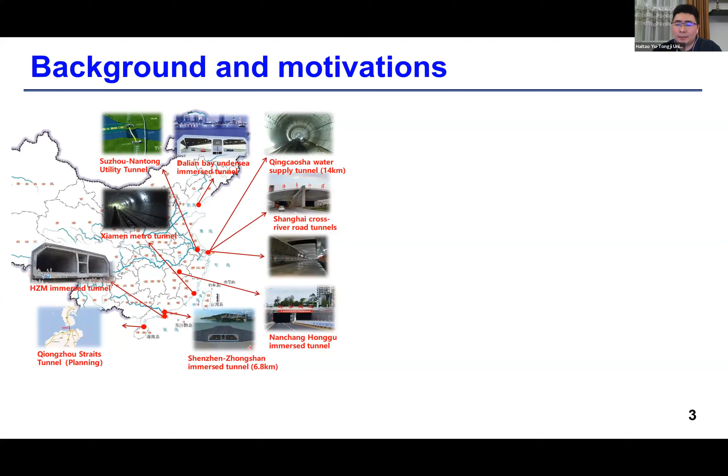As we know, underground constructions are booming recently, especially in China. For example, there are a number of submarine tunnels distributed in the eastern coastal areas of China, and also a large number of mountain tunnels in western areas of China. But during the 2008 Wenchuan earthquake with a magnitude of 8, we investigated 55 mountain tunnels close to the epicenter and found that 38 of them were damaged at different levels, including cracking, concrete spalling, and even collapse of the whole tunnel liner.

This brings evidence that seismic design for tunnel structures is still an important issue which is not well understood yet.

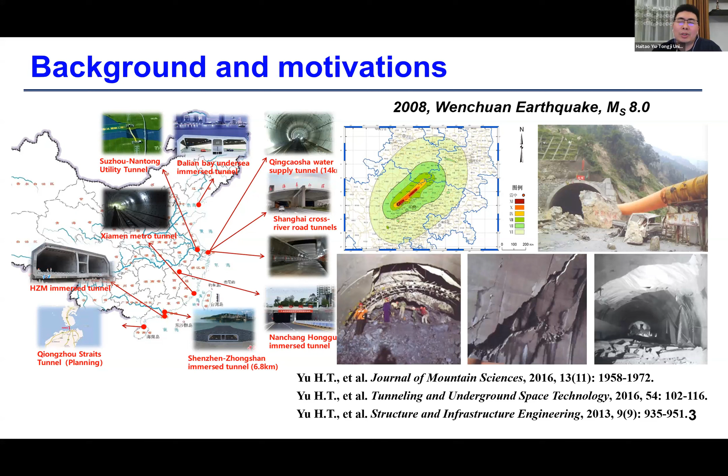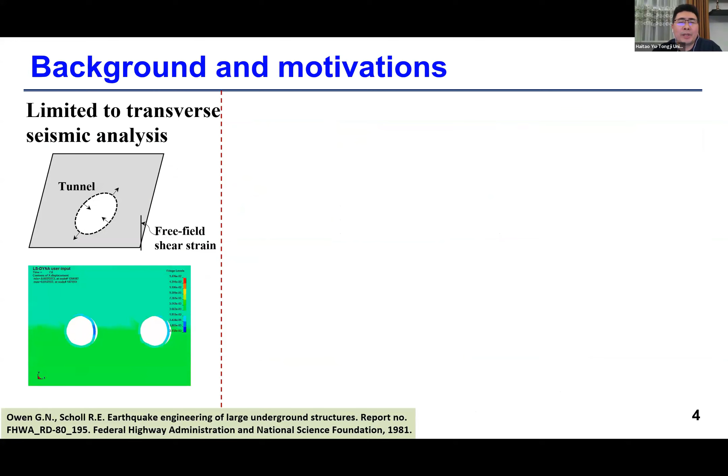From the literature review, current studies on seismic analysis of tunnel structures focus on 2D conditions and cross-section response. That is, they assume the problem as a 2D plane strain condition and only consider the shear deformation of the tunnel section under vertical shear loads.

But there are still two other deformation modes along the tunnel. One is called worming deformation, where the tunnel has axial compression and extension. Another is called snaking, where the tunnel has longitudinal bending deformation. This deformation mode was already reported by Owen in 1981.

Also, tunnels have long distance, so as the earthquake travels, each section of the tunnel may experience a different time lag due to the wave passage effect. Another issue is that the tunnel crosses different soil mediums with different soil stiffness, which causes non-uniform seismic input along the tunnel. But currently, few studies have been reported in this field.

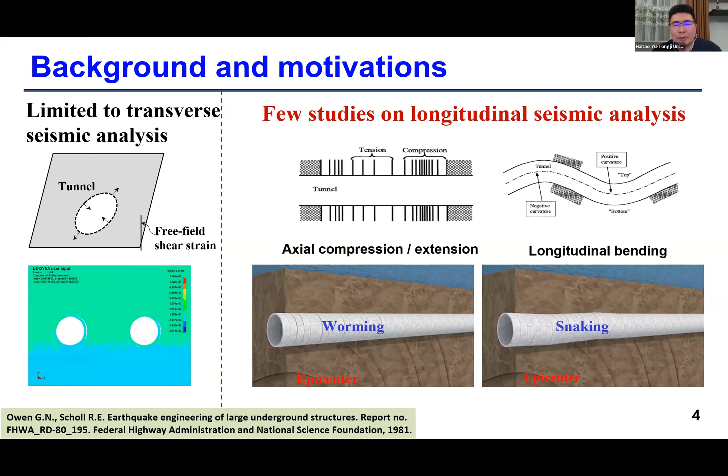That's the focus of my research. To understand the longitudinal response of tunnel structures and the non-uniform seismic input, we propose several seismic analysis methods. We can use current on-site seismic monitoring to understand the seismic effects of the site, but it's hard to use for understanding soil-structure interaction under seismic loading, because we don't know when, how, or where the earthquake will come. So physical model testing will be one of the options to understand the tunnel response under different seismic loadings.

Currently we have advanced facilities like at Tongji, where we have 4 large shaking tables that are movable in a long trench with a total length of 70 meters. This facility was originally developed for bridge engineering, because for each bridge pier we can put on one shaking table, allowing us to realize non-uniform seismic input. But the critical issue for simulating non-uniform seismic input for long tunnels is how we can use 4 discrete shaking tables to realize the continuous seismic input from the bedrock.

So to solve these issues, we first propose the test theory that we have to develop the model container to transfer the seismic input from the shaking tables into the bedrock. First, we can assume the model container as a beam.

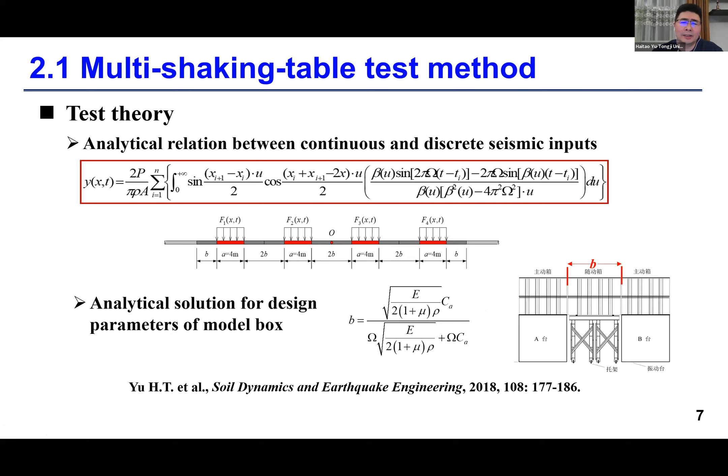design parameters, so with this theory we made a model container which consists of segmented boxes and connections between each of them, and also a supporting system to keep the model container moving horizontally, with no friction between the supporting system and the model container by using a ball joint. The total length of the model container is 40 meters, the width is 4.5 meters, and the height is 1.5 meters.

When this facility was done, we did a number of validation tests, including not only the vacant model container but also the free field test. We can see that the acceleration from the bedrock at the bottom of the model container, in either the transverse or longitudinal directions, are consistent.

The test data are consistent with the theoretical value, and the errors for the phase angle wave passage effect can be neglected. This first demonstrates that the developed model container can well capture the wave passage effect from one side to another.

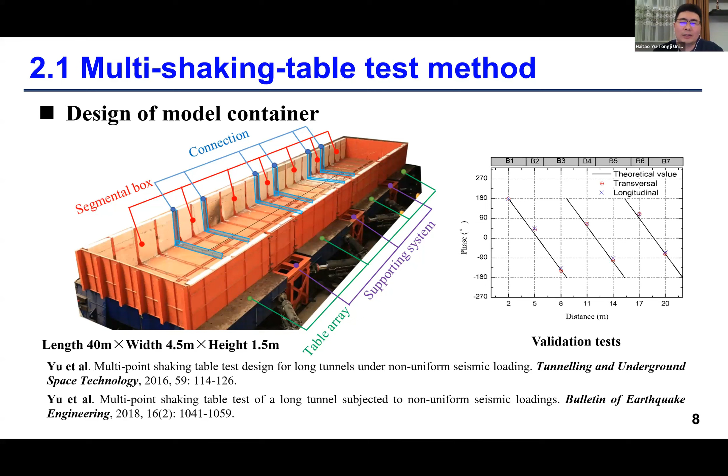With this facility, we actually applied it to several projects in China. Here is one, a super long immersed tunnel with a total length of 6 kilometers, which is the world's longest immersed tunnel, connecting three cities: Hong Kong, Zhuhai, and Macau. We put the whole tunnel in the model container to simulate the non-uniform seismic input on the tunnel response, with a geometric scale ratio of 1 to 60.

The model soil was a mixture of sand and sawdust, and the model tunnel is made of aluminum. We also further considered the immersion joint configurations, based on the equivalence of joint stiffness principle.

With this developed and established shaking table test facility, we did a number of shaking table test cases, including not only uniform and non-uniform seismic input, but also different seismic waves, seismic input intensity levels, and different directions.

We obtained the result that, compared with uniform seismic input, non-uniform seismic excitation would significantly amplify the tunnel response. For example, for the immersion joint deformation, it will be amplified to over 3 to 5 times compared to that of the uniform seismic input.

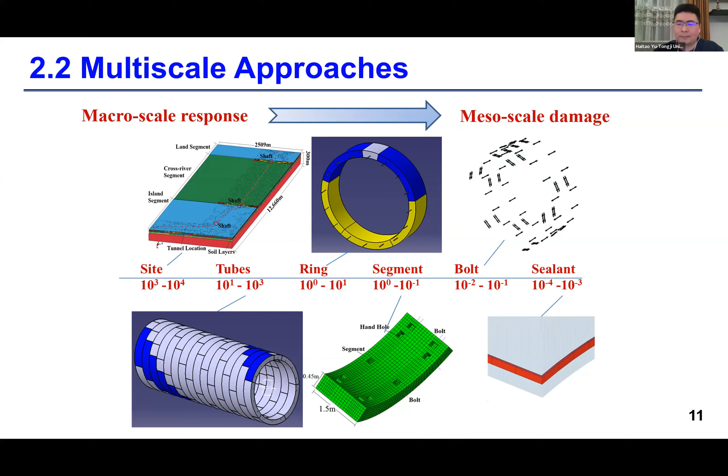In the millimeter scale, so from kilometer to millimeter, multi-scale issues do exist for the numerical simulation. We can use different models and different meshes to consider different scales.

But the critical issue for the dynamic problem is that spurious wave reflection will occur at the interface between different models and different meshes, which was already addressed by Professor Ted Belytschko from Northwestern University in the US, who passed away a couple of years ago.

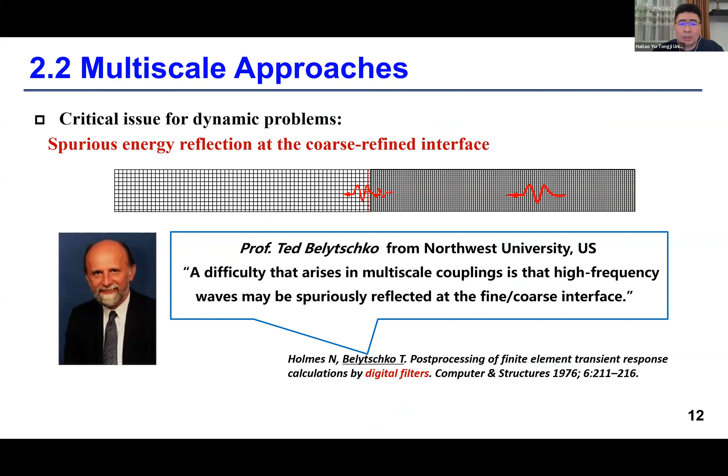Based on the bridging domain method, we proposed the MUSCO method by coupling the different meshes. Like the coarse mesh, we can simulate the equivalent tunnel structure without joints, but also for the refined area, we can simulate more details about the segment and joint and both configurations.

To connect each two scales, first we set overlapping areas between each model, and then we can introduce parameter alpha.

It's from 0 to 1 to give a linear combination of the energy between coarse and refined meshes in the overlapping areas, so we can obtain the total energy for the whole domain.

Then we also further consider the constraints between each two models at the overlapping areas, and we factor them into the total energy by using Lagrange multipliers.

With this, we can obtain the governing equations for different scales. Because this method is based on energy, the proposed method does not have spurious wave reflection at the interface.

And also does not need any artificial filtering procedures. So to solve this equation, we can use the central difference method, which is an explicit algorithm. But if we use a single time step, the computation cost will be very expensive, especially when the number of coarse meshes is much larger than that of refined meshes.

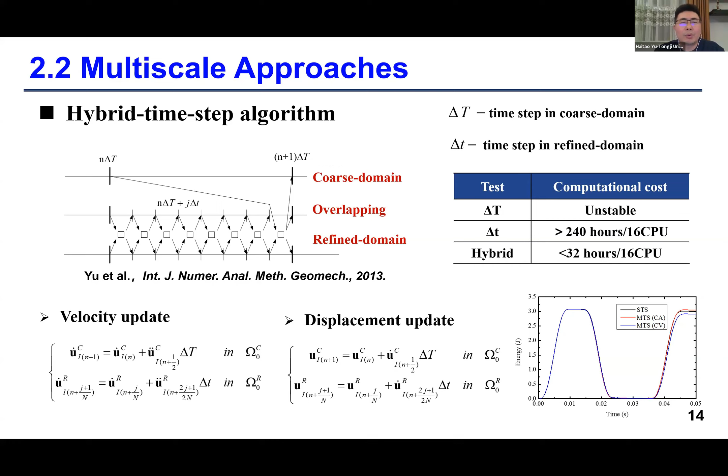To further consider the damage of tunnel structures under strong earthquakes, we further extended the MUSCO model by coupling continuous domains using the finite difference method with discrete domains to simulate the cracking, spalling, or collapse of the tunnel using the discrete element method.

Similarly, we use the MUSCO model to connect the two models to ensure that the wave can transfer smoothly from one model to another across the overlapping areas. We also did several case studies to validate the accuracy of the model.

With this method, we have applied it to several projects in China. Here is a super long water conveyance tunnel with a total length of 14 kilometers, built in Shanghai as a shield tunnel, built in soft soils.

We use the MUSCO models to simulate the whole tunnel and soil system. We can see the dimensions of the model: the length, and the width of the model is 2.5 kilometers, and the total depth of the soil layer is 300 meters.

So the total element mesh is almost 4 million. We did the simulation in the Shanghai Supercomputer Center using 65 CPUs, and each run takes around 3 days to finish.

With different case studies, we obtained many meaningful data. With that, we can better understand the tunnel response under different seismic loadings, with different burial depths and crossing different soil mediums.

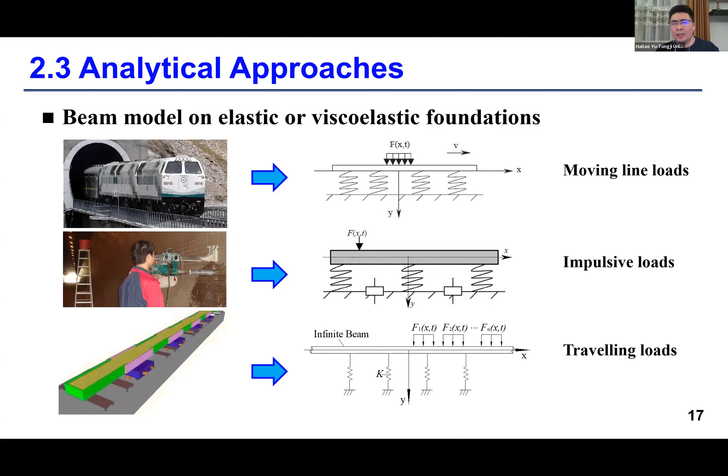First, we obtain a solution for the Euler-Bernoulli beam resting on a viscoelastic foundation subjected to arbitrary dynamic loads.

You can see from the picture that EI is the bending stiffness of the beam, rho A is the mass, F is the arbitrary dynamic load distributed along the tunnel length, K is the soil spring stiffness, and C is the damping of the soil.

We can inspect the governing equation for the dynamic problem. It's very simple: the first term on the left side corresponds to the internal force, the second is the inertial force, and the last two terms correspond to the reaction from the soil foundation. The terms on the right side correspond to the arbitrary dynamic loads.

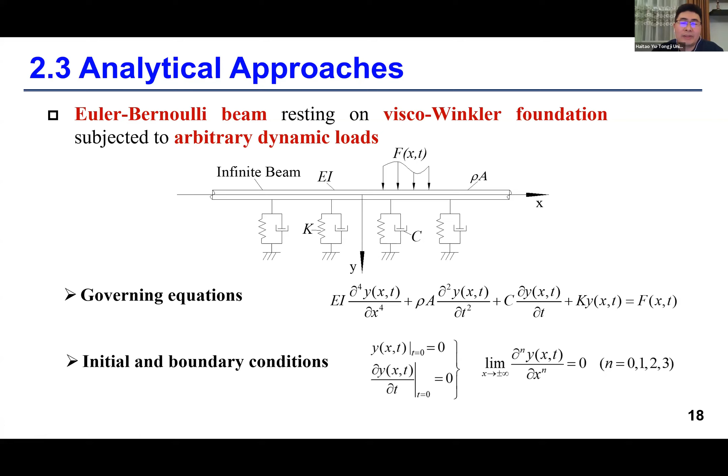We further consider the initial conditions as static, and for the boundary conditions, infinite length for both ends of the beam. So we can employ the integral transform method, that is, the Fourier transform in the space domain and Laplace transform in the time domain.

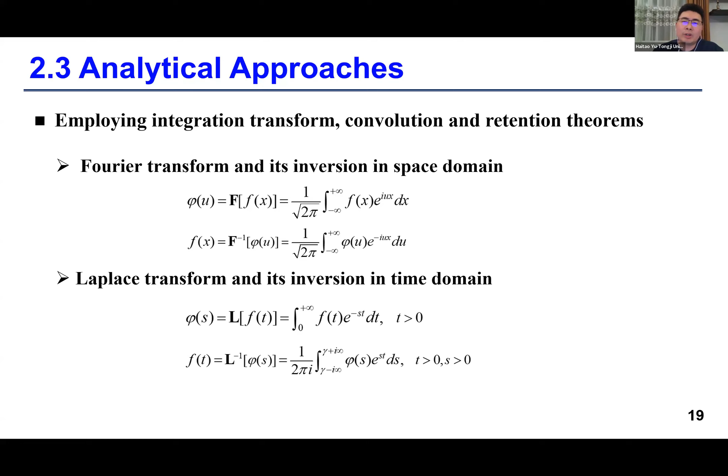Then we can transfer the original partial differential equation into an algebraic one. We can then use the inversion to get back to the original space and time domains. We further use the convolution and residue theorem to further simplify the expression of the solution.

Here we give the final generic expression of the solution for the deflection response of the beam. We can see that if the form of the dynamic load is specified, then we can obtain the explicit solutions.

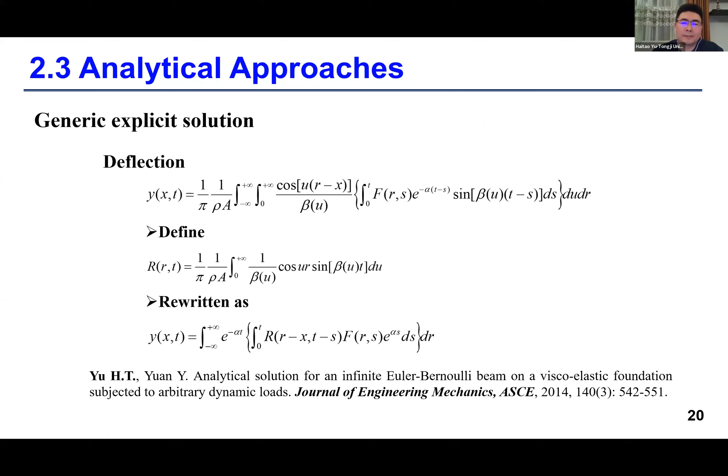Later we extend the Euler-Bernoulli beam to the modified Timoshenko beam by not only considering the shear deformation of the cross section, but also the rotary inertia caused by the shear deformation. We obtain two common equations for force and bending moment. Then similarly, based on the integration transform method, we obtain the two unknown terms: deflection and the bending rotation angle of the beam.

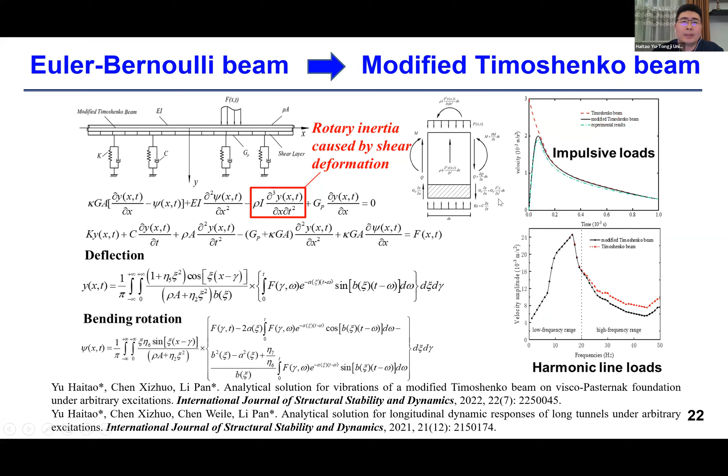With this solution, we can do parametric analysis for different kinds of dynamic loads with different frequencies. We also extend the original infinite uniform beam to the finite uniform beam, because for a short tunnel with limited length, we have to consider the conditions on both ends. Also the tunnel may cross different soil mediums with different stiffness, so here we use the mode superposition method to obtain another solution.

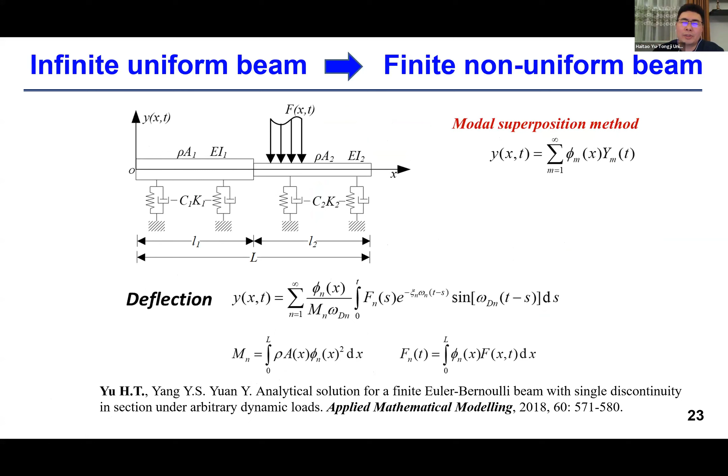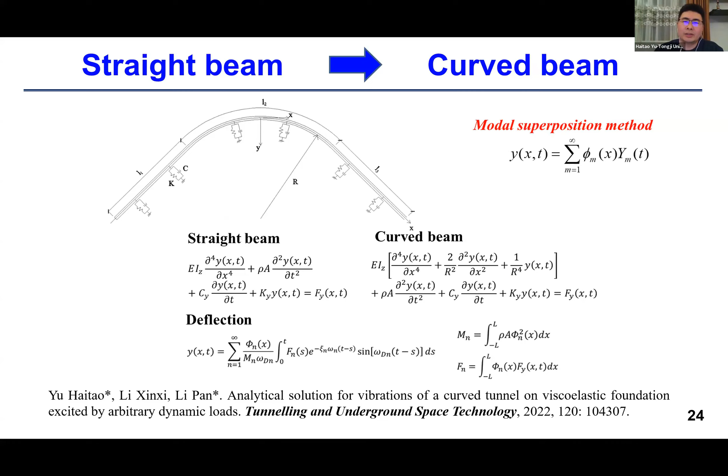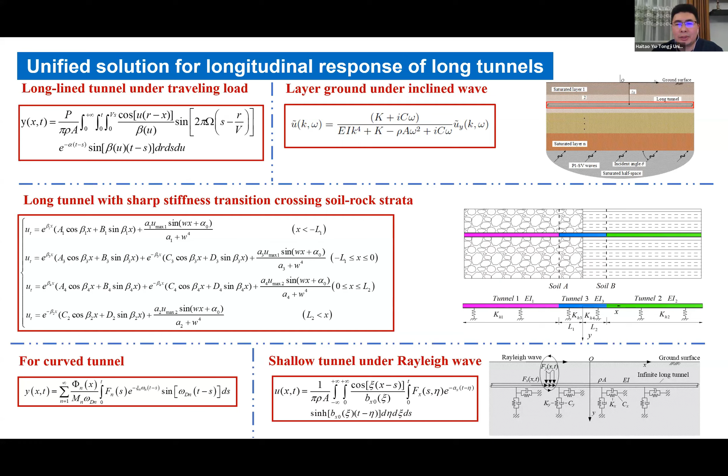Here I give the unified solution for the longitudinal response of long tunnels. It includes not only the long straight tunnels, the curved tunnels, and traveling loads, but also the tunnel buried in layered ground with inclined waves, and long tunnels with sharp stiffness transitions across different soil mediums like soil and rock, and also shallow buried tunnels affected by Rayleigh waves.

Here I want to give several case studies. Case one is the application of the analytic solution to a subway tunnel in Shanghai in soft soil, which was built by shield tunneling. We want to consider the dynamic response of the tunnel structure under traveling loads.

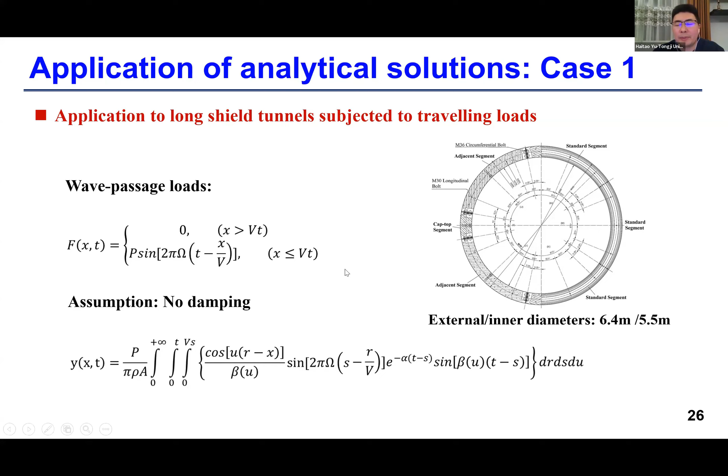Here's the plot showing the typical cross-section dimension of the subway tunnel in Shanghai. Also for the wave passage load, we give the specific expression where P is amplitude, omega is the circular frequency, and V is the wave traveling velocity. Assuming there's no damping, we can obtain the deflection of the beam response under the traveling loads.

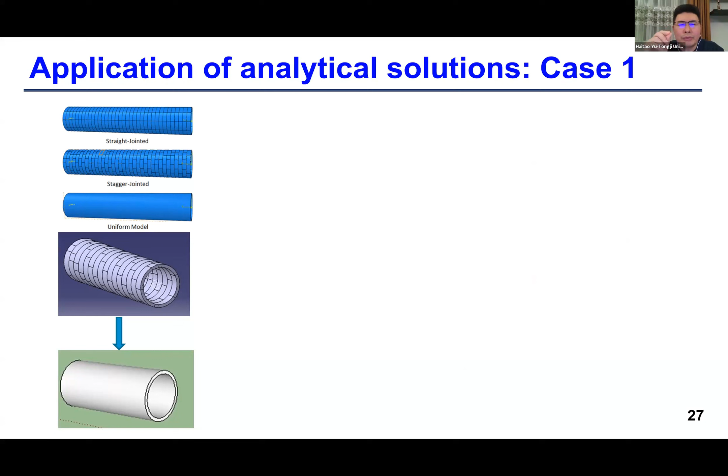But there's one issue: for shield tunnels, there are circumferential joints and longitudinal joints. So how can we assume this discrete structure acts as a uniform beam? Here we obtain a new solution for the longitudinal bending stiffness for shield tunnels.

We not only consider the details of the circumferential joint configuration, including the rubber gasket, bolts, and segment, but also consider the transverse stiffness of the tunnel structure by considering the deformation as oval deformation, and we introduced the two parameters a and b of the oval deformation into the expression.

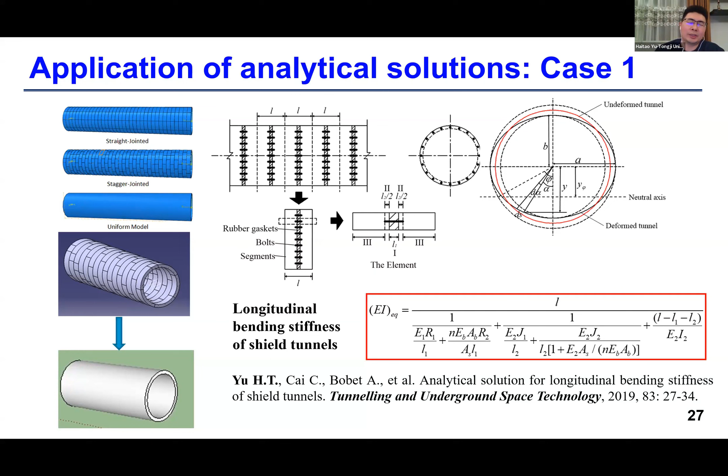With this analytical solution, we can obtain an equivalent uniform stiffness for the beam structure by considering the details of the joint configurations. Then we can obtain the solution, and with the solution we can do many parametric analyses.

We can see that the wave passage effect would significantly amplify the tunnel response, which should be paying more attention in the seismic design of long tunnel structures.

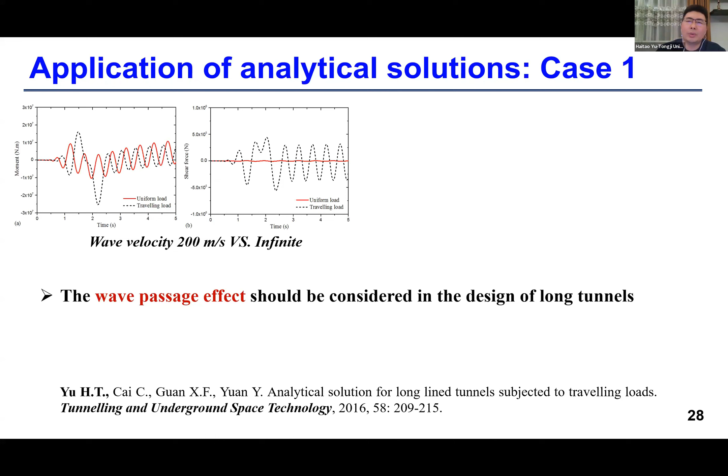We can also do parametric analysis on the influence of wave velocity and frequency, and we can see both have a dramatic effect on the tunnel responses. What's more interesting is that for the beam moment response, as the wave passage velocity goes from 200 meter per second to 800 meter per second, the beam response first increased and then decreased. That means there's a critical wave velocity that exists for the seismic design of the tunnel structure.

From the frequency response, we can see the lower frequency gives the larger response. That means we should pay more attention to tunnel structures buried in soft soil, because for soft soil the frequency will be much lower than that of a structure buried in rock.

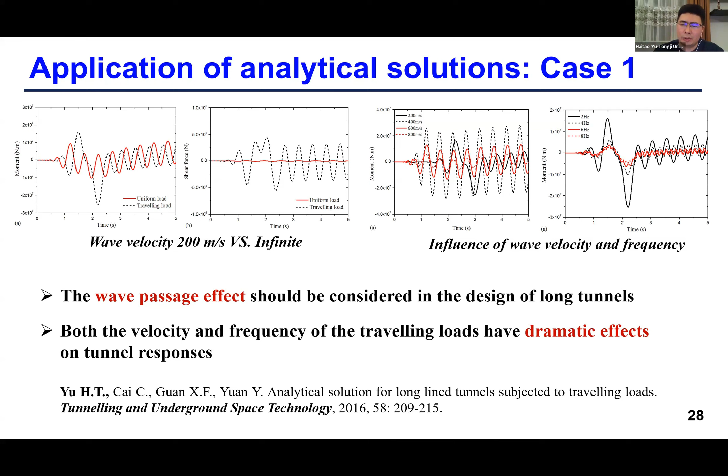Case two is the application of the analytic solution to a long tunnel with sharp stiffness transition. Tunnel 1 and tunnel 2 are buried in different soil mediums, and tunnel 3 is a transition tunnel connecting them. First we give a simple model, and we assume the free field deformation is simplified as harmonic waves.

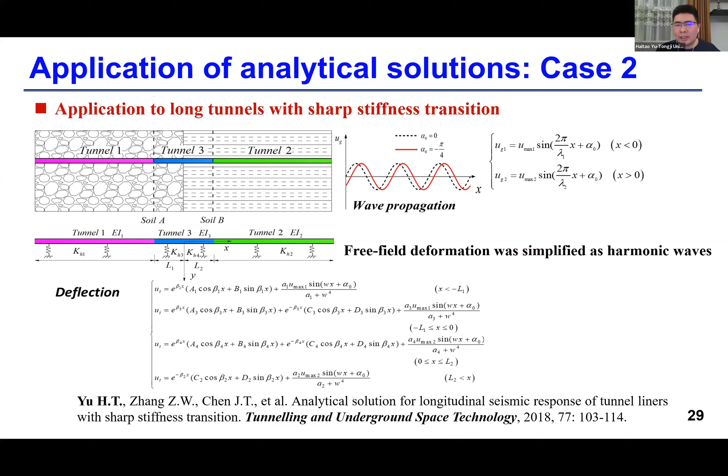We want to further consider the response at different sections, so we move the harmonic load along the tunnel with different phase angles. Then we can obtain a pseudostatic analytic solution for the beam response under different phase angles.

With this analytic solution, we can apply it to a real project in China: metro line number 3 in Xiamen. Tunnel 1 is a rock tunnel built by the mining method, and tunnel 2 is a soft soil tunnel built by the shield method. Tunnel 3 is a transition tunnel connecting tunnel 1 and tunnel 2.

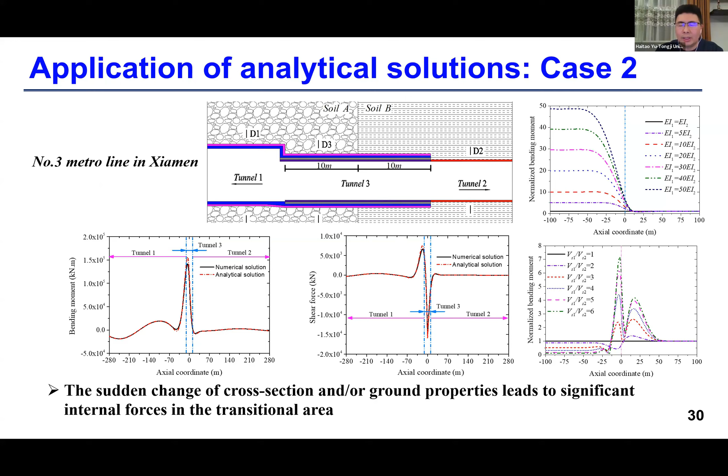With our developed analytical solution, we can easily give the design and obtain an evaluation of the safety of the structure. We can also do parametric analysis to give the optimal design parameters for the tunnel structures, especially for transition tunnels crossing soil mediums with sharp stiffness transitions.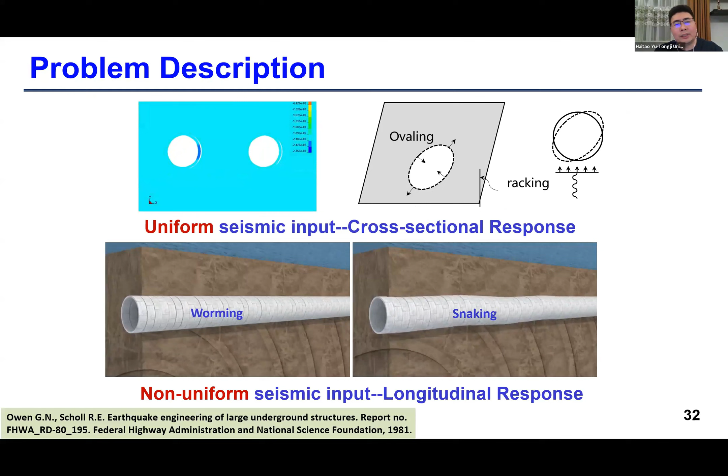We can divide it into two parts. Part one is the cross-section response under uniform seismic input, and the other is the longitudinal response under non-uniform seismic input. For the cross-section response of the tunnel structure, there's a large body of literature.

What I want to show you is that we developed a unified solution for the transverse response of underground structures, because most studies in the literature focus on circular or rectangular shapes with specified geometry. Here we obtain a unified solution for tunnel structures with arbitrary liner sections, which is very important for mountain tunnels.

We also consider the tunnel buried in different ground conditions, including orthotropic conditions for rock, and saturated conditions with drained and undrained cases, and also soil structure interaction including full slip and no slip conditions, as well as voids behind the liner.

This is due to construction issues. So the unified solution can be very suitable for arbitrary cross-section tunnels buried in different ground conditions.

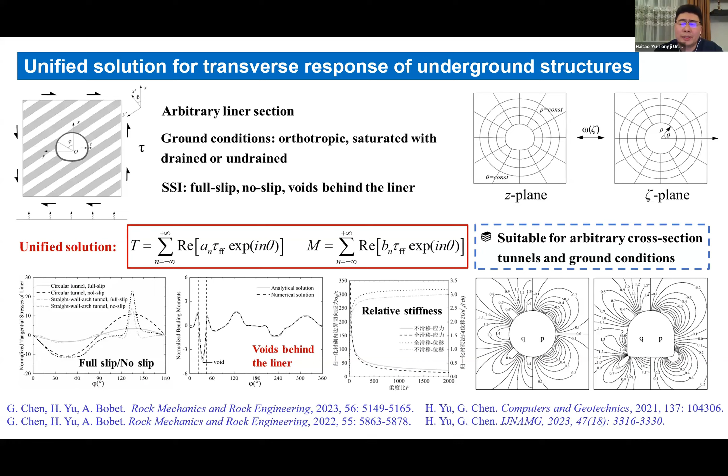For the cross-section response, what I want to talk about here is that current studies and current tunnel design only focus on structure safety, but neglect the inner structures, the non-structural components, and the function of the tunnel structure.

Here's an example: the road tunnel built in Shanghai, the Zhuguang Road Tunnel, with a diameter of 14 meters and 1390 meters long.

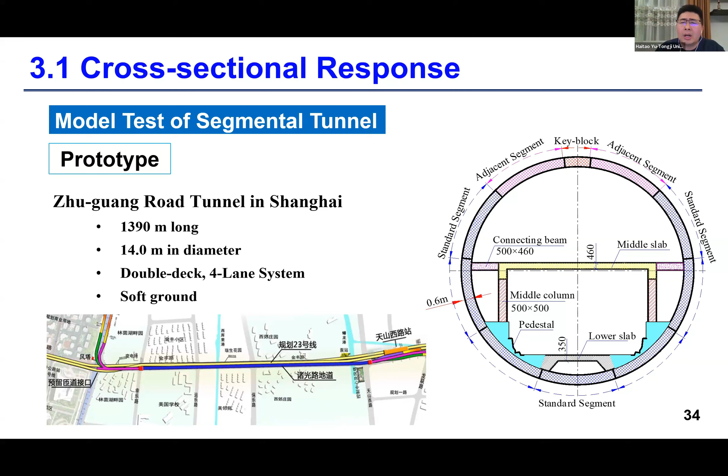So for the current design, they only consider the outer liners and neglect the inner structure. So how about the influence of the inner structures and the interaction between the outer liner and inner structures?

So we did a comparative test. The first case is the segmental liner without the inner structure, which is the current design. The second is the double deck system, corresponding to practical conditions. The last two are just for interest: the full ring and the semi-ring at the bottom, just for reinforcement of the structure.

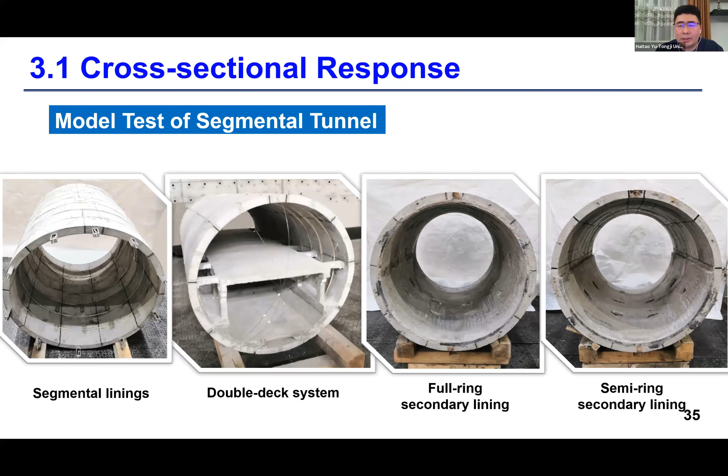So what I want to show is what we obtained from the comparative test under harmonic loads. It's very interesting that for the tunnel structure without inner structures, we see the tunnel has very smooth oval deformation. This is well known to be due to pure shear deformation.

But for the tunnel structure considering the inner structures, we see that the liner response first decreases in the lower half of the tunnel due to the constraint of the inner structures, but increases in the upper half. Also, the connection of the inner and outer liners will be significantly amplified compared with the structure without inner structures.

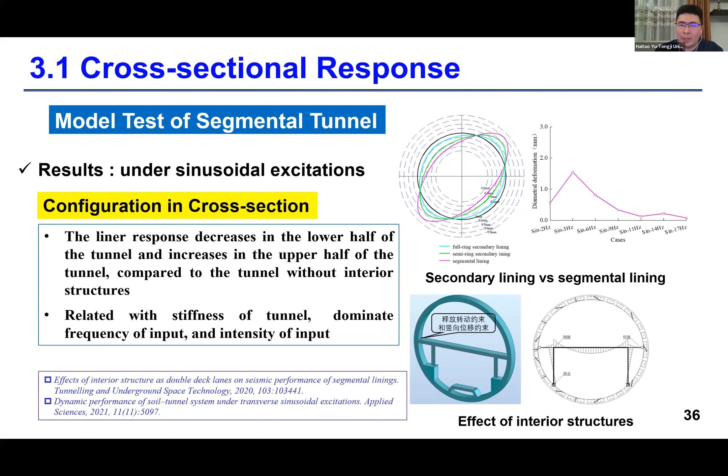This response is related to the stiffness ratio between the inner and outer structures, the connection between them, and also the seismic wave properties. So with this test, we better understand the connection between the inner and outer structure, which should be paid more attention to in the seismic design of practical engineering.

For the longitudinal response, I don't want to take too much time since I already showed this in previous sessions with the shaking table test. We used the shaking table test to investigate the dynamic response of the super long immersed tunnel connecting Hong Kong to Zhuhai-Macau, which is also located in a high seismic intensity area. From the test results, we see the tunnel structure response in both longitudinal and transverse directions.

We also compared it, and the response is amplified compared to that of the uniform seismic input.

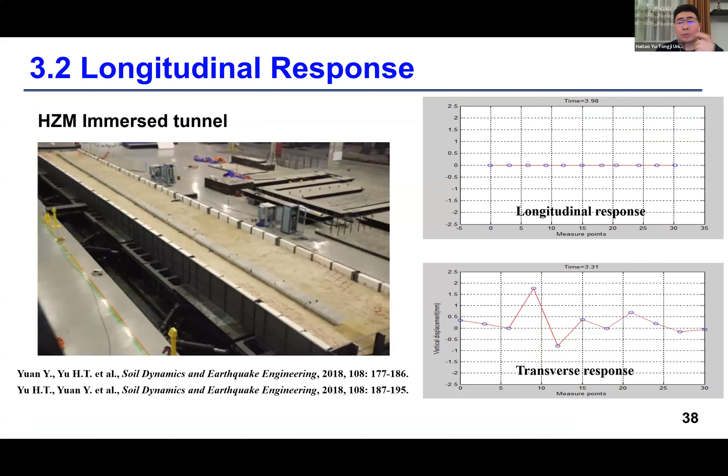We also used this facility to investigate the Yangtze River tunnel in Shanghai under non-uniform seismic input. The bottom animations show the response under uniform and non-uniform seismic input. We can see that under uniform seismic input, the tunnel responds moving in the same direction, like a rigid structure movement.

But for the non-uniform seismic input, the tunnel has a very S-shaped snaking deformation, which enlarges the joint deformation of the tunnel. This should be paid more attention to in practical design.

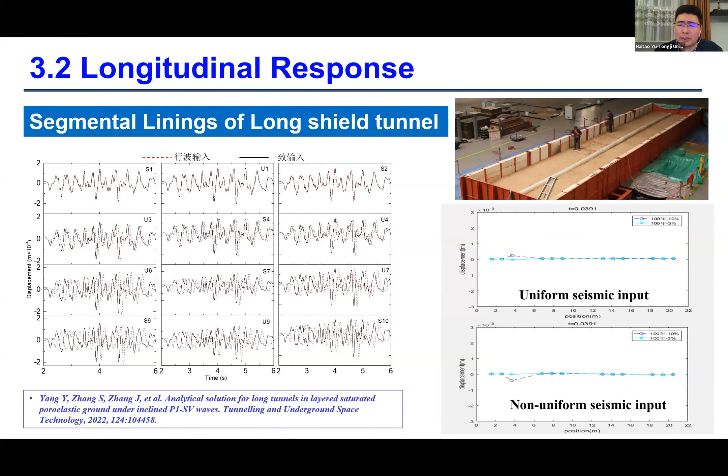What I want to show here is what we call the third effect, the space effect, which is due to tunnel structure stiffness transition, and also possibly due to tunnels crossing different soil mediums with different stiffness. The first example is the junction with shaft transition of stiffness, like a shield tunnel connecting with a working shaft or cross passage.

For the connections between the tunnel and the shaft, we obtained from the shaking table test that the joint deformation at the connection will be amplified up to 10 times compared to normal areas far from the connection. This is very significant, so we incorporated it into the design and further proposed several design measures to address this situation.

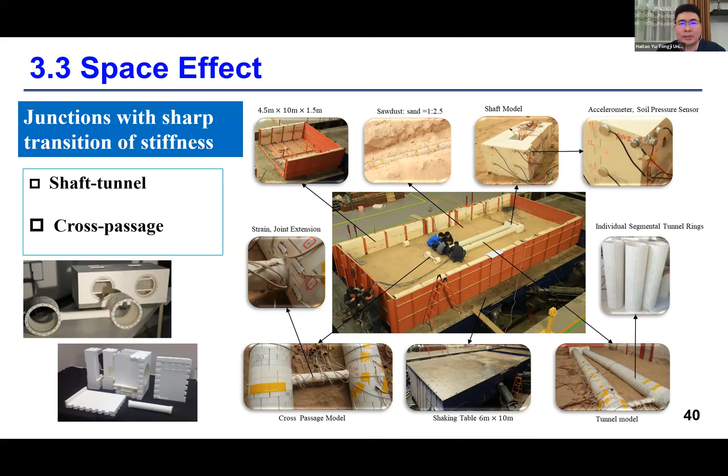Another example is a subway station in Shanghai built across an already existing highway bridge. We used a combined construction method: for each side of the bridge we built using cut-and-cover, and for the crossing area we used pipe jacking. Clearly, the connection at these pipe jacking joints will have a large response due to the stiffness transition of the structure.

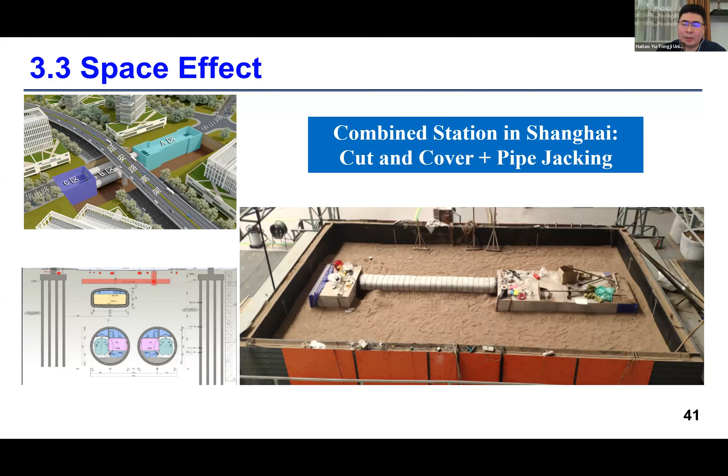Another example is a subway station built in rock in Qingdao. We built the subway station using a tunnel group: the top tunnel is built for the station hall, and two bottom tunnels for the station platform, with several passages connecting each of them.

Similarly, we did the shaking table test and numerical simulation to observe the effect of the tunnel group and its mechanisms. Clearly, the space effect does exist.

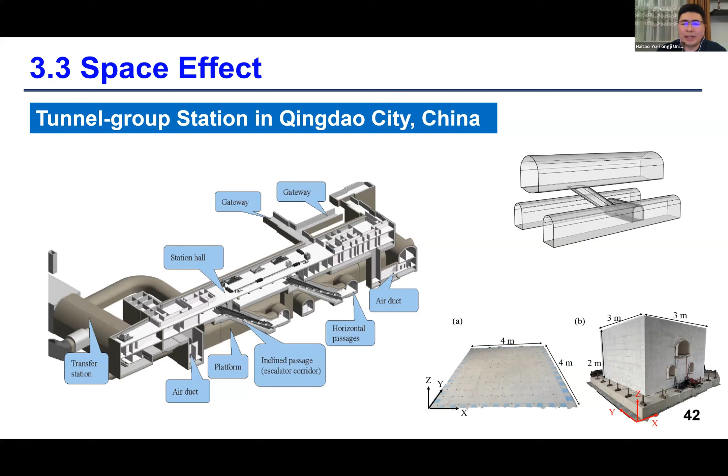Another example is the cross transfer subway station, which is very common in metro cities for subway transfer systems. We also used the shaking table test to see how it affects the structure, and the connection at the cross transfer subway station response will be very significant.

So if we do the current design this way and that way, we just do the cross-section response, we cannot get the connection response because there exists a space effect at the connection. So we obtained a mechanism and also developed several simplified design methods for practical design.

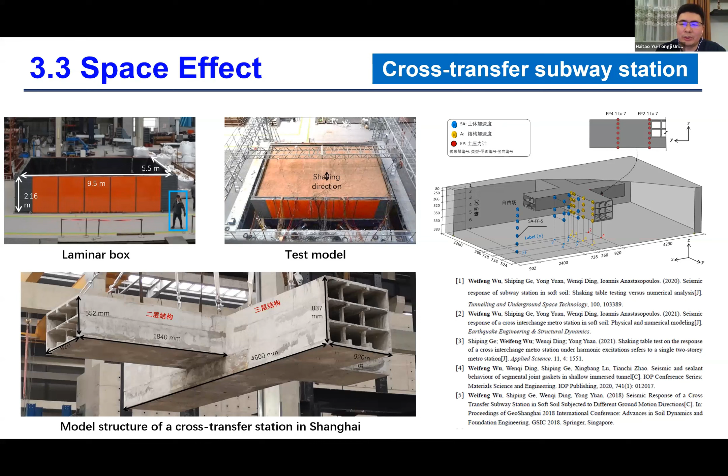There's another one: shallow buried tunnel structure in Shanghai, actually a shield tunnel without a working shaft. For deep buried shield structures, it's interesting that the response is controlled by the ground deformation and soil structure interaction. But for shallow structures, or even structures above the surface, it's controlled by the inertial force of the structure itself. So how about between these two areas? That means the critical depth should be considered for the seismic design of this kind of structure. This is the dissertation of one of my PhD students.

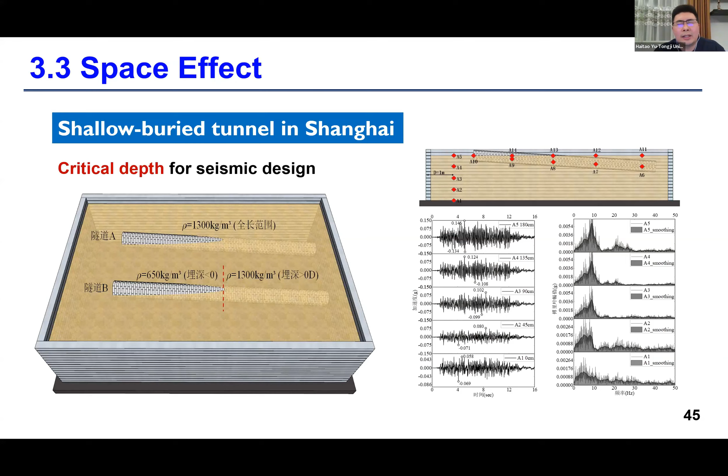Another one is near Valley subway station, which was planned as the first subway station in Makati, Philippines, because Philippines is a high seismicity area crossing the fault. In this case, the subway station has a shallow buried depth and is close to the water valley, with closest distance about 7 meters. So we did a number of shaking table tests to investigate the topographic effect on the shallow buried near-valley subway station.

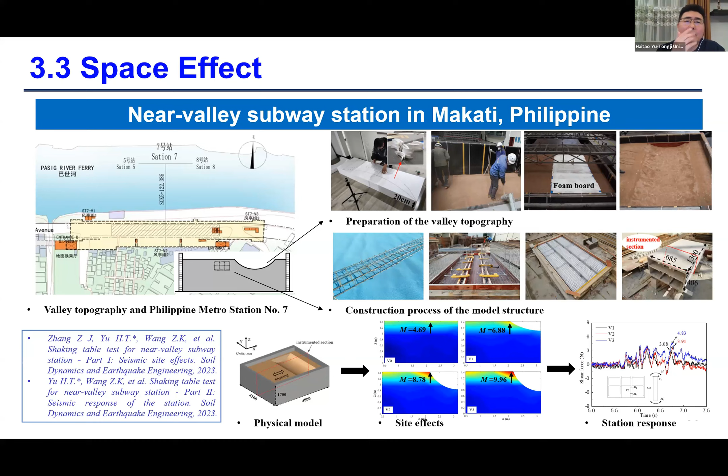There's another one: a subway station structure with a diaphragm wall. For practical designs, some design companies only consider the inner structure and neglect the effect of the diaphragm wall. To check if this is safe or not, we did a comparative test, considering subway stations both with and without diaphragm wall, put in one model container and placed on the shaking table.

We see from the test results that, for the subway station structure considering the diaphragm wall, the deformation of the subway station is reduced due to the constraint effect of the diaphragm wall. But meanwhile, it brings much more dynamic soil pressure on the diaphragm wall, and especially the connection between the station bottom and the diaphragm wall will have a large response, which should be paid more attention to in practical design. We also developed a simplified analytic solution to consider this adverse effect of the diaphragm wall.

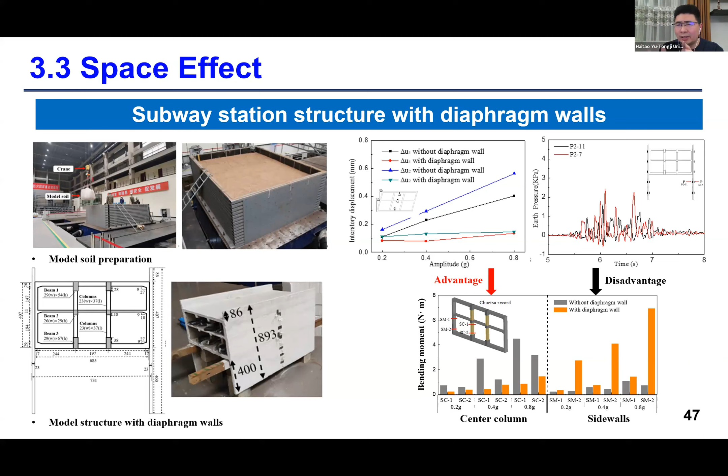With this understanding of the seismic effect on the tunnel structure, we can better propose several seismic mitigation control technologies to further improve the seismic performance of the tunnel structure. First is the cross-section response. It's well known that the tunnel cross-section response is controlled by the stiffness ratio between the soil and the structure, so maybe we can cover the tunnel with an isolation coating layer.

But how can we design the parameters? Here we obtained an analytic solution for the tunnel covered by an isolation coating layer. With this solution, we can do parametric studies to give optimal design parameters for the coating layer buried in different soil mediums. It's interesting that for tunnel structures buried in soft soil, the coating layer should be much stiffer, like a grouting effect, but for rock tunnels the coating layer should be very soft.

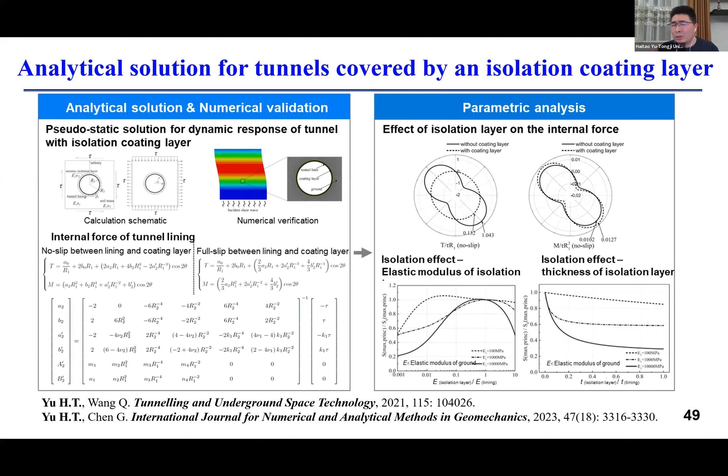For shield tunnels, the seismic performance is comparatively very good because they're very flexible and can be well adapted to ground deformation. But what I want to focus on is the connection between the shield tunnel and the working shaft. As I mentioned before, the response at the connection will be amplified up to 8-10 times compared to normal areas. So we invented a seismic mitigation configuration and inserted connectors for the circumferential joint. We observed from shaking table tests that with this measure, the maximum tension stress of the tunnel structure can be reduced by 17%.

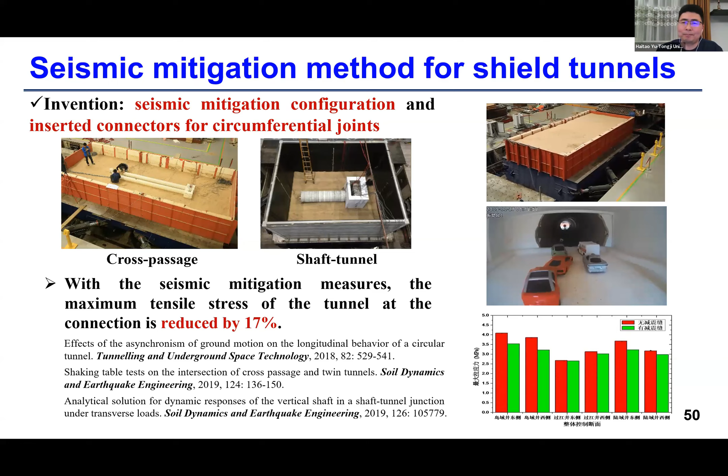For the immersed tunnel, we take the example of the Hong Kong-Zhuhai-Macao link. Each element of the immersed tunnel is about 180 meters long. If we take this model with an integral tube, uniform without any joint or circumferential joint, we observed from numerical and physical tests that more than 80% of the joint opening will exceed the limit, meaning that joint leakage will occur.

So we proposed an optimized segmental method for immersed tunnels, to separate the integral tube into 8 segments.

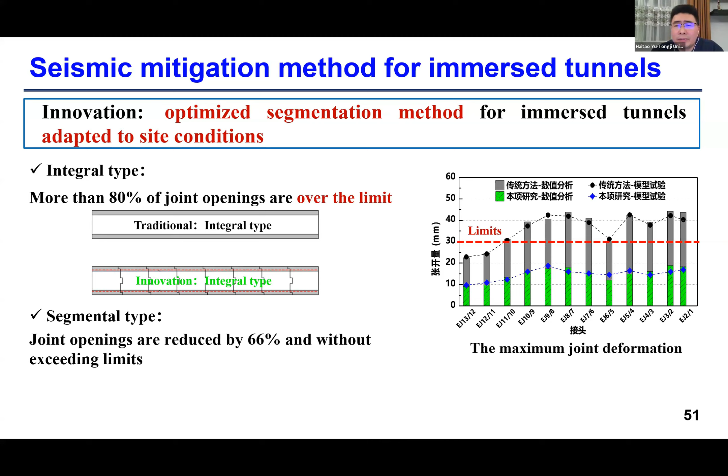To better adapt to the ground deformation as part of the seismic space effect along the tunnel, we observed from the numerical and physical model tests that the joint opening will be reduced by 66%, all without exceeding the limit. This effectively supports the construction of the Hong Kong-Zhuhai-Macao linkage immersed tunnel.

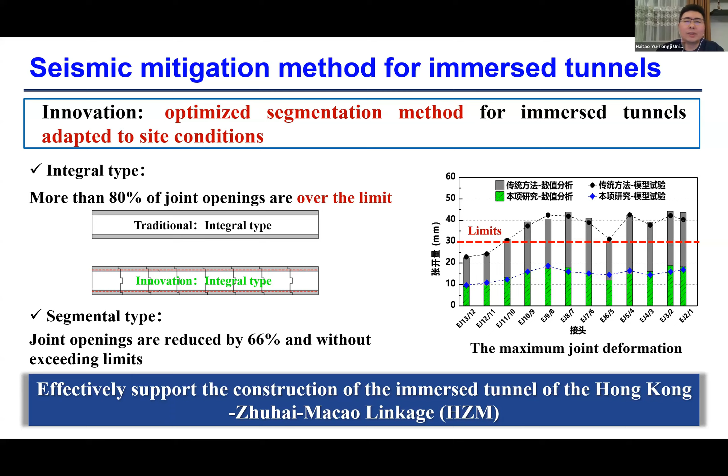Since the immersion joint is a weak part compared to the stiffness of the segment or element, we further invented a novel seismic mitigation joint, which is a replaceable buckling restraint brace damping component, placed on each side of the sidewall of the immersed tunnel. We did a large scale test, 1 to 10 geometrical ratio, structure test for the immersion joint.

We observed from test results that the energy dissipation capacity of the joint is increased, and with this developed equipment, it further guarantees structural safety during strong earthquakes.

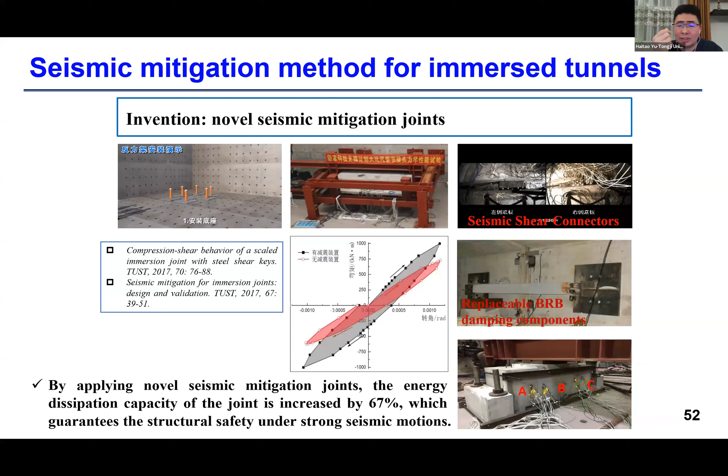Here I would like to end with the conclusion. We propose several analysis methods - physical, numerical, and analytical - to better understand the tunnel response, soil-structure interaction, and the damage mechanism of the tunnel under strong non-uniform seismic input. With this knowledge of behavior, we can better propose seismic mitigation control methods, aiming for resilient design and to increase the seismic performance of tunnel structures.

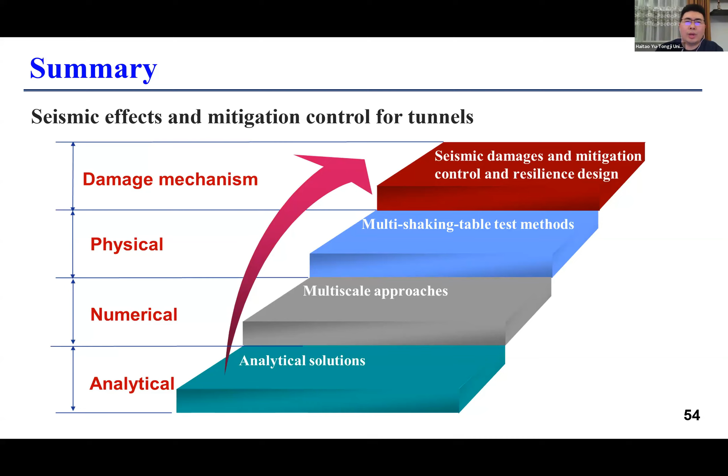We also applied this method - seismic mitigation and analytic solutions - to a number of projects, not only in China, but also in the Philippines and other overseas areas with strong seismic intensity requirements. We also incorporated this method and technology into 5 national, industry, and local standards in China.

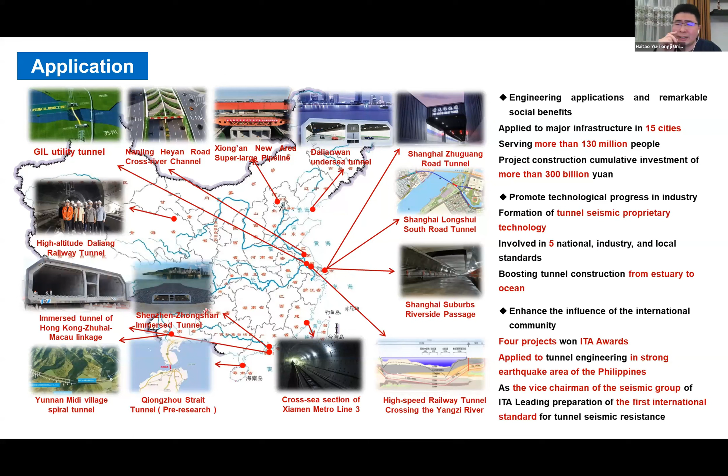Currently I'm the vice chairman of the Seismic Group 9 in the International Tunnel Association, and I'm leading the first international standard for tunnel seismic resilience design. Here's my contact information, and please also see our published review paper for your reference. This work was contributed to by my research group, and much appreciation goes to them.

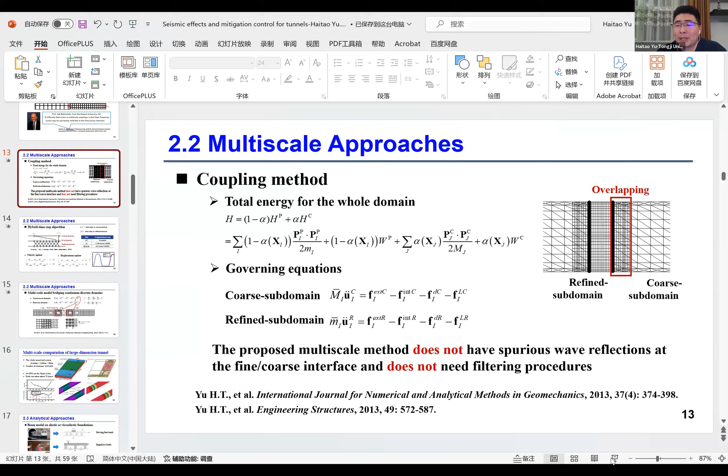You talked about how you coupled a discrete element model to a finite element model near the beginning - could you talk more about how this coupling is done? Because that's very curious. Let me see, can you see this slide here?

This connection is based on the bridge domain method. In this method, we first set the overlapping areas for the coarse domain and the refined domains. Inside here is the refined domain, and the outside is the coarse domain. We put the overlapping area like a bridge.

To consider this, first we introduced the parameter alpha, ranging from 0 to 1, to connect the energy in the refined domains and coarse domains, giving a linear combination at the overlapping areas. This way the energy can be transferred smoothly over these areas.

There's also another consideration: constraint equations in the overlapping areas, for the finite element mesh nodes in the coarse domain and the refined domain. This should be satisfied by the constraint equation for displacement. We put this equation into the total energy using the Lagrange multiplier method to treat it as a no-constraint problem. With the total energy established, we can obtain the governing equations for the coarse domain and the refined domain.

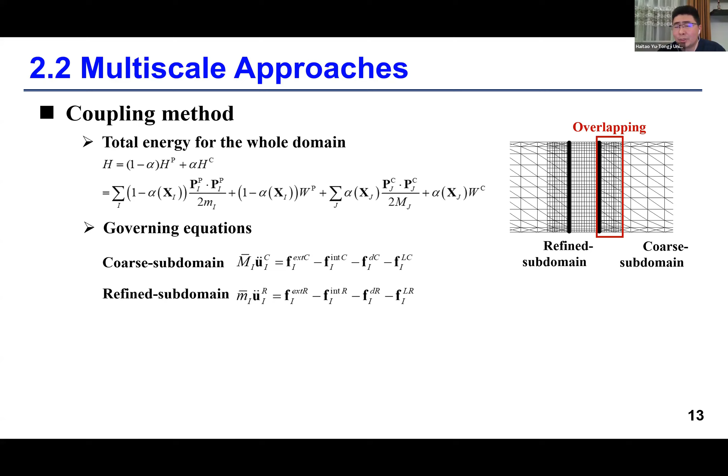So we use this central difference method. First, we don't consider the constraint and give the trial velocity, then we further consider the velocity balance equation at the overlapping areas. Then we can obtain the equations to solve the Lagrange multiplier, update it to get the true velocity. For each time step, we do the iteration until the final time is solved. So this is the whole procedure.

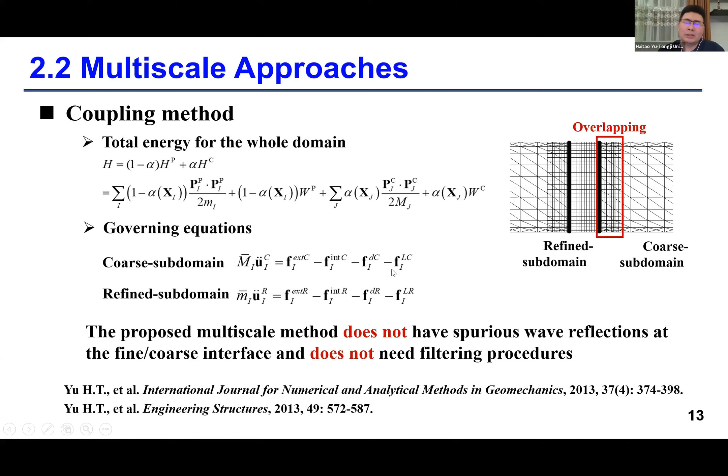Later we expand this to this one. It's a similar procedure, but different. The original one is the mesh, the finite mesh with coarse and refined regions. But here it's for the finite difference method and discrete method. We do it in a similar way, using the bridge domain method to connect them.

Very cool, this is really cool. And it's rare to see people coupling things this way. It's cool. Yeah, thank you.

Other questions from the audience? Please don't be shy. Oh yep, I see one. Hello Professor Yu, may I ask if there is a comparison between simulation or experimental results and measured data, or post-earthquake tunnel damage? Was there a field comparison? Actually we do have the comparison, but due to limited time, I didn't mention it here. I separate this method into numerical, analytical, experimental.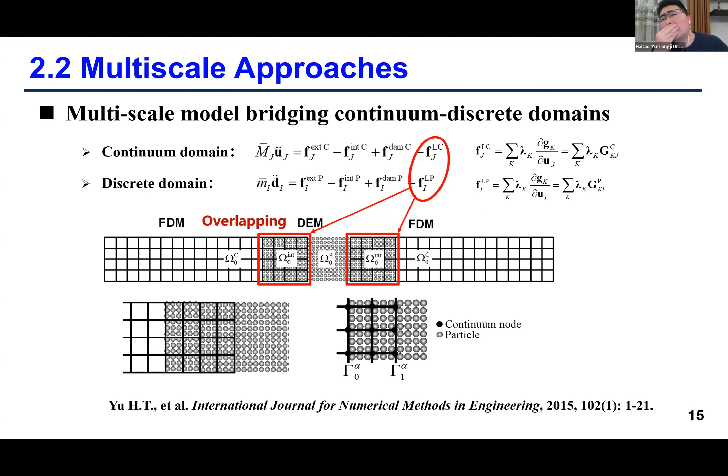For example, for the numerical simulation, as I mentioned, we also do validation tests, but this test is a validation test. You really focus on this. For this validation test, it's hard. Usually we can only do the local areas, but for the whole engineering project, it's difficult.

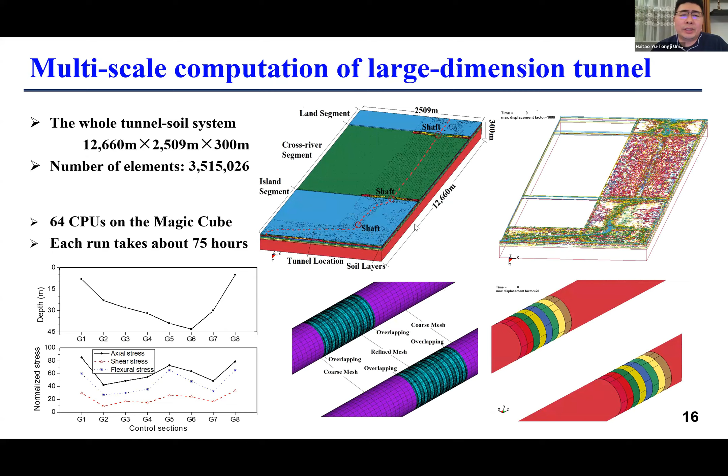But for the physical test, yes, usually when we do physical modeling, first we do the numerical simulation. But this numerical simulation is just at the same scale as the test. First we use the numerical simulation to design the test, and with the test data we can go back to validate the numerical model and compare it. After this comparison, we use the numerical model to get back to the original scale using the scale ratio. So the validation only focuses on the same scale as the physical model.

For the field data, it's very limited because you don't know when an earthquake will come. That's the difficulty. Currently we have some projects that also pay more attention, so we may give some suggestions—you can put monitoring stations especially in earthquake areas with frequent earthquakes. Then we can get the data to further evaluate the design scheme. But currently, I think no, because you don't know when it will come. No different, no different. Currently it's just numerical simulation and physical testing, kind of this.

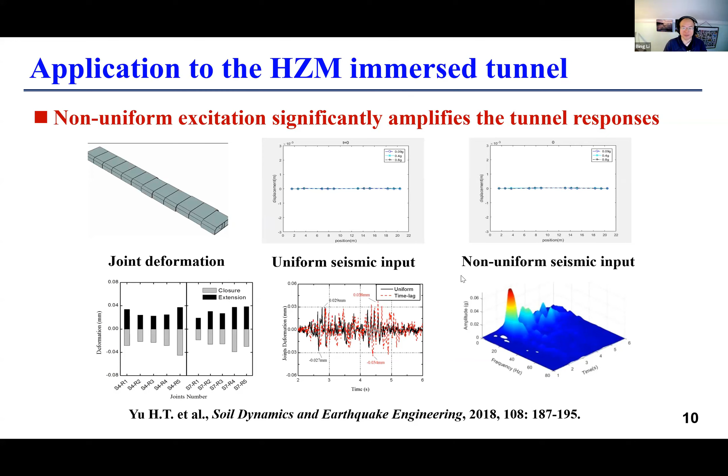Well, just the scale of your shaking table test is impressive, right? I see a person for scale. This thing is what, 100 meters long, 50 meters long? You mean this one? The physical model, we put it at different scales. Because this, like the Hong Kong-Zhuhai-Macau link, it's very long, we do the scale ratio at 1 to 60. So it's quite small.

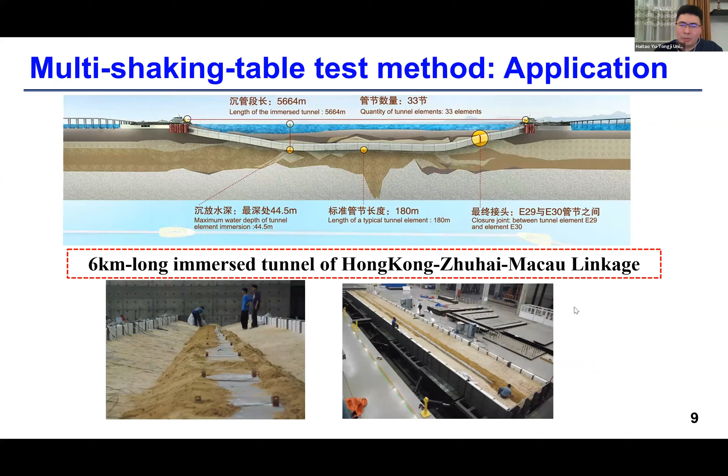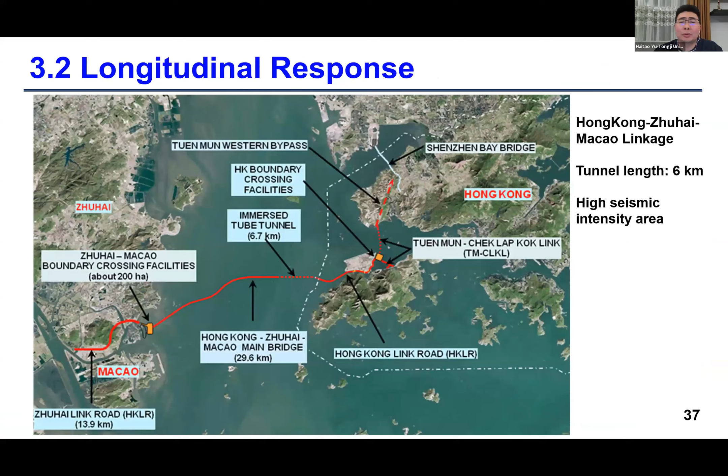But later when we do other model tests, like this one and also this one, the scale ratio is I think 1 to 10, or 1 to 15—it's very large. So we put two shaking tables together, so the dimension can be 10 meters by 6 meters. So it's very large, the diameter is almost 70 centimeters, so a person can go inside to place the sensors.

I hope not during the shaking. No, definitely not, that's so dangerous. No, they would kill us. But there are still some issues—it's not very good to see people doing this, and some people don't wear helmets, like this guy. Oh okay, now we have the strictest restrictions. I think that's good to hear. Then it would be fair, I guess. Okay, glad to hear that.